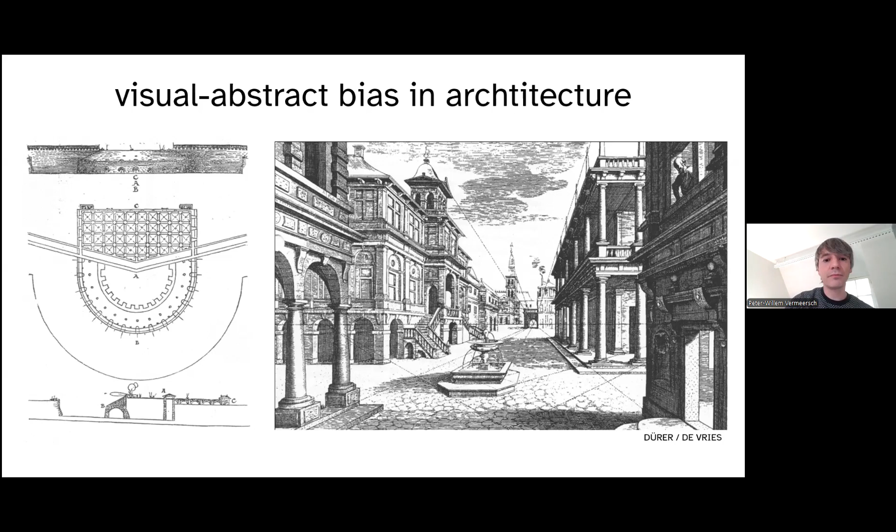In the Western society, we have developed techniques such as perspective drawings, relating back with the development of the single point perspective. We see that, for instance, in the urban organization, that these axial designs become in vogue. So there is a link between the kind of techniques and tools we develop as architects and the kind of architecture we make throughout history.

But also in our contemporary days, we see that same kind of thinking further being developed. So we work in abstractions, we still work in plans, visual schematics, but also the techniques that we've developed that go more beyond the abstract towards the experiential. We see a heavy focus on visual realism. And even if we make physical models, we tend to mostly look at them and make these models to evaluate the visual quality of our projects. And one of the effects is that the kind of architecture often goes towards visual iconic value.

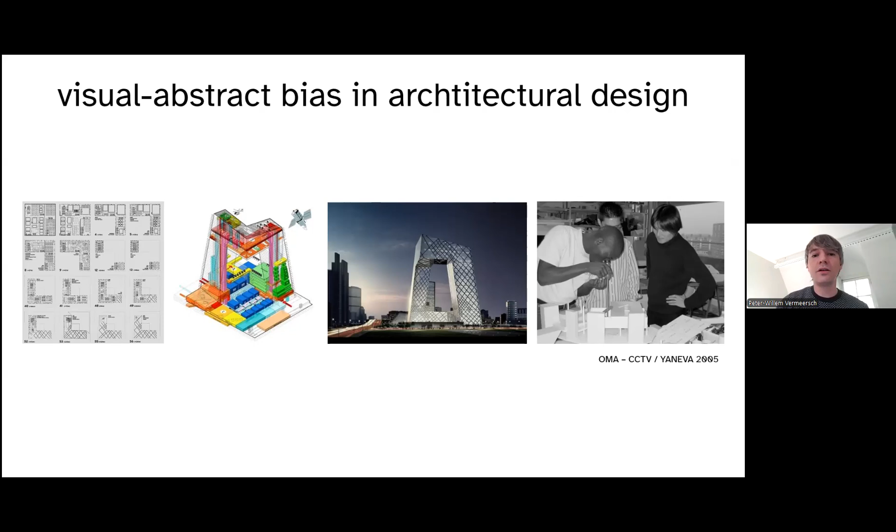But in fact, we can say, okay, architecture is to blame, but it's a more general aspect in our society, and architecture is one part of that. And we also see it in how the body is often defined. In architecture, from the Renaissance, we see that the body is a source of proportion. Architects strived for divine beauty, and since in Catholic thinking at the time man is created in the image of God, they found these proportion systems in our own bodies.

Later in modernism, we've seen two strands of modernism. First, organicism, looking into the natural processes and understanding those processes and designing from that. We see also that the human body is seen as a natural object in motion that has certain dimensions, which has eventually been developed into the field of ergonomics, of which the book of dimensions of the body by Neufert is, in our education system at least, a very well-known example.

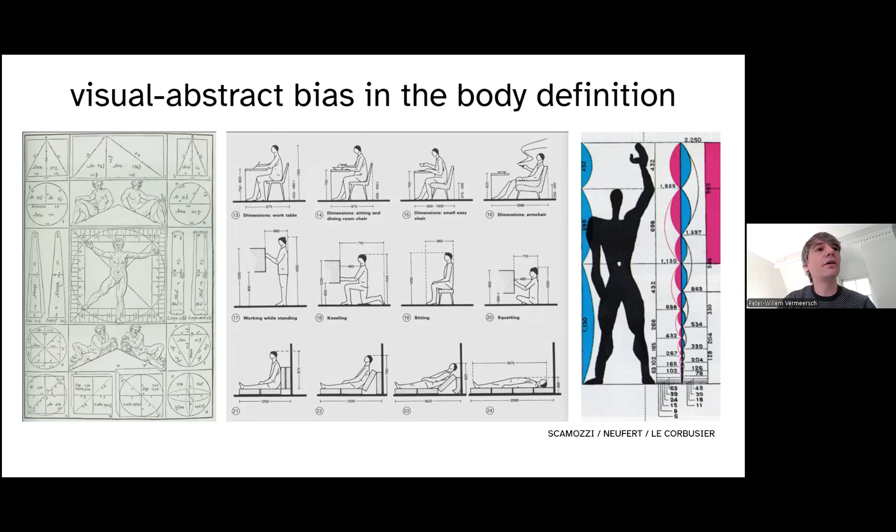So this kind of thinking has led us into a direction with a focus on vision and a focus on abstraction. But of course, we know that our body is more than just the sum of its parts. So we look into disability studies, which say a bit more about the human body. So from this understanding that historically there is a visual and abstract bias in architecture, what does that mean when you cannot see anymore? What is the meaning of architecture in that regard? And that was the starting point of my research. How do we engage with buildings in non-visual ways also?

For instance, developing more attention for the senses of touch, of sounds in our environments, and smells. And to better understand that, I've turned to the work of Professor Patrick Devlieger, who has been studying what disability is in our society for quite some years.

And he came up with an understanding that throughout history and within society today, there are different models of understanding disability. And the first model is a religious model. It's the oldest model, where it was seen that if you have a physical body impairment, it can be either a punishment or a gift from the gods. In your experience, your quality of life, you are either marginalized in society or you get an exceptional position. And the questions that are asked around this are why, and the existential question, why me?

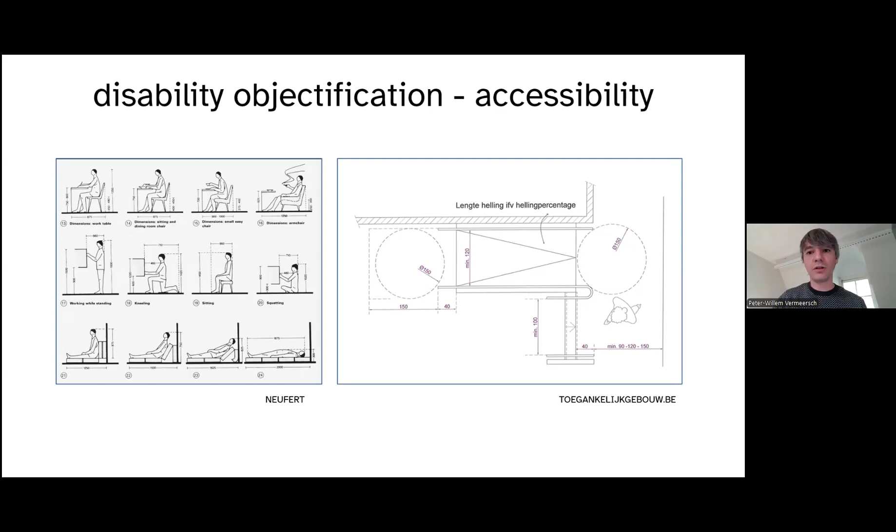Coming from the social model, the more vocal group, if we look back to the United States in the 70s after the Vietnam War, the war veterans were a politically very strong group.

But in his studies, Patrick Devlieger also developed an understanding that there is a possible cultural model as well for disability. So it's also rooted in how we even consider what it means to be human. So it's on the level of identity. Yeah, so his studies were focused on the insight that people who are deaf have been developing their own culture, because they have their own language, and thus form a specific kind of group within society with their own identity.

And actually their quality of life becomes transformational. It is looking into what is specific to our experience and how we can get a sense of being out of that, and how from that idea of identity we can critique society at large.

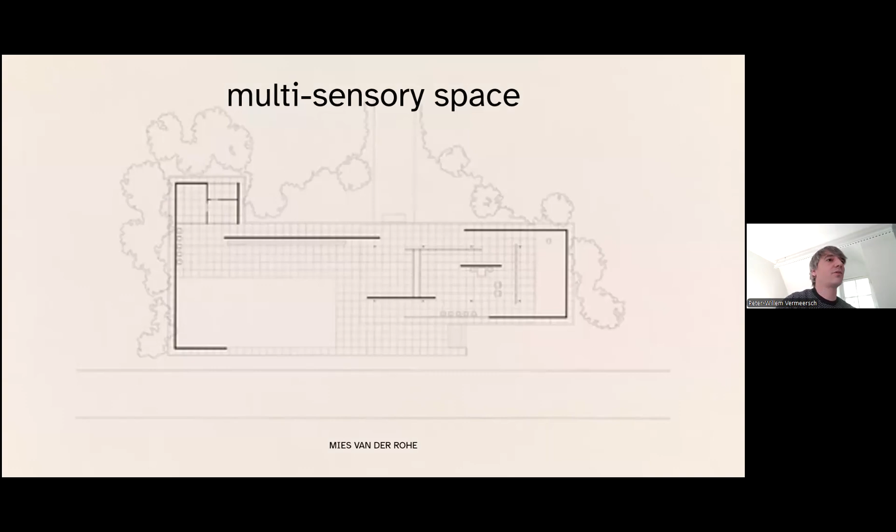But we also learned from these kinds of interactions with, for instance, Carlos, that there are also other kinds of spatial qualities, and that these spatial qualities have their own distinct boundaries in space. So when Carlos explains how he pays more attention to the warmth of the sun on his skin, he also explains that for him there are now two extra spaces. So it's not only the visual space blocked by the wall, but also the space where he feels warm versus the space where he feels the coolness of the shadow. And in between those spaces, there is this boundary. Here we can visually see it, where the shadow and the sun are separated. But these lines are not on the plans.

The same with the acoustic space. He explains how the sound of his cane, the reverberation of his footsteps, when he is in an open space, disappear into the sky. But when he enters this space that is covered by this small roof, the reverberation changes because the roof also acts on it, and it becomes a separate kind of space for him. And again, that line, that transition, is not on the plans that we draw.

Also visually, we can say that there is this kind of transition from the spaces on the left that have this warm travertine material that reflects the light, versus the colder, bluer light in the small courtyard on the other side of the building. There again, the atmosphere of that building completely changes. So this is one of the key findings that we take from this investigation with them, and we will explain it with some of the projects that they have designed themselves: multisensory space has different layers according to the different senses, and different boundaries than we are used to when we only pay attention to the visual space.

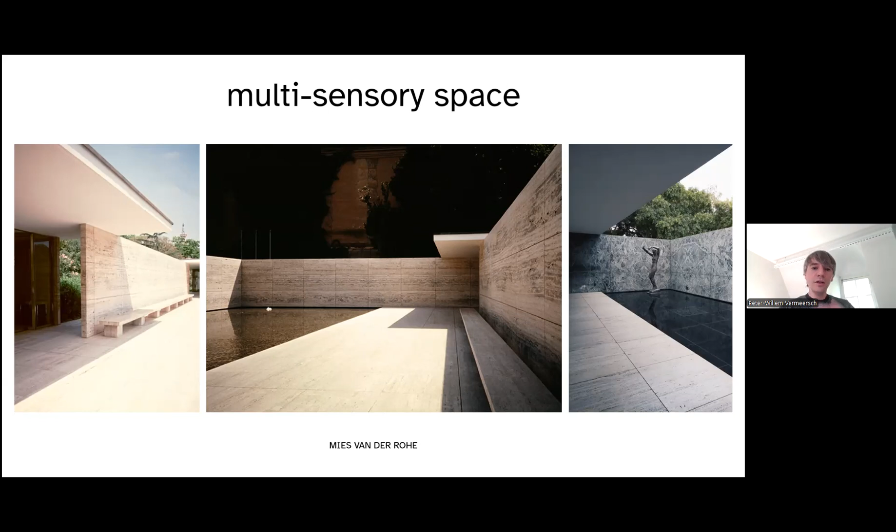As much as we can bathe in light, vision can as much put us inside our world as hearing can put us outside the world when we start to abstract sounds, when we start to name them. The people who listen to or observe birds can distinctly pinpoint and name different sounds in our environment. And so they are not as much involved in the sound, but much more objectifying, again, the specific sounds that they can distinguish.

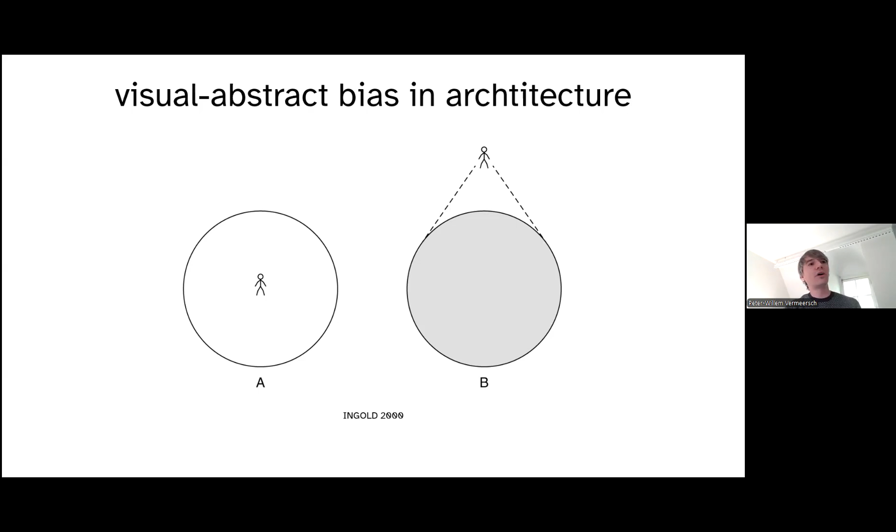So that was a bit of a side note: our insights about this multisensory space can actually also help us understand vision in architecture as well. I'm not going to go deeper into that part, but that was one of the findings of Natalia's PhD, that there is a possibility to understand vision in a new way. But now I will go deeper into the cases that I studied in my PhD, by Carlos Mourão Pereira, but also the case of Christopher Downey.

As architects who have lost their sight and continued to look into the profession of architecture, they were very interesting cases for me to study as an in-between the theory and the participatory approach. These are people who have both the professional expertise and the user expertise within themselves, and I wanted to study what kind of possible knowledge exchanges, what kind of results can come out of that.

And the first case that I want to study is the sea bathing facility that Carlos designed. In Portugal, the coast can be quite dangerous. The surf can be quite rough. So they have this habit of building swimming pools along the coast, to be able to go swim but not need to swim in the sea. And they are a bit further away from the sea. So while you swim, you can see the sea, but otherwise you are a bit distanced from it.

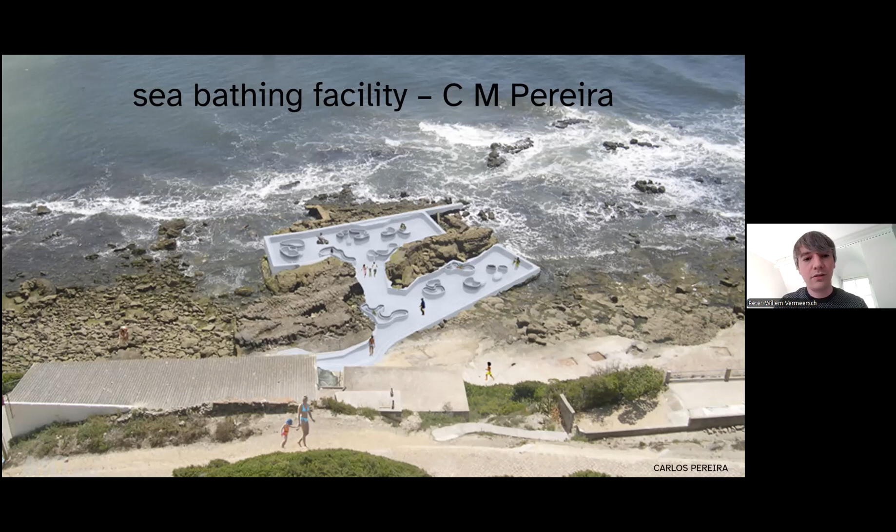And that's where he started to think of what kind of swimming pool type can I design that still has this notion of safety, but that brings me back to the sea. And he positioned his swimming pool in the location between high tide and low tide, so that if we make a representation of the space of movement, the haptic space, the tactile space, the space of touch, we make a distinction on the left side for the high tide, where you are safe with the walls, but the waves crash over, they come higher than the walls. So they start to give you this experience again of being in the motion of the waves.

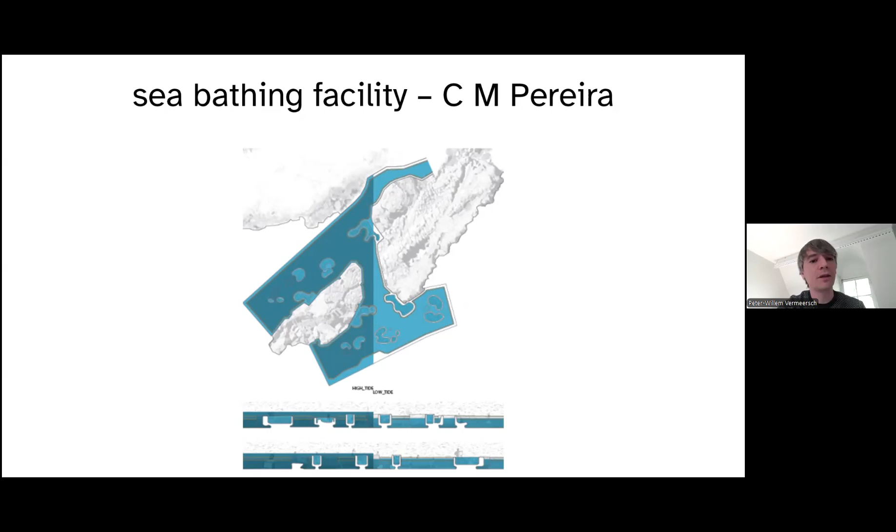And you also have the wind blowing against your skin. So you also have this boundary between the water and the air, which is also for Carlos a very important boundary that he started to investigate. And when the tide is low, you have again this calmer experience, but also these puddles of water. The smaller basins retain more water. And it's his conception that within these smaller puddles, the sea life can take hold again and grow and develop and be experienced almost as a museum of sea life, a museum of the sea, a museum of the surf.

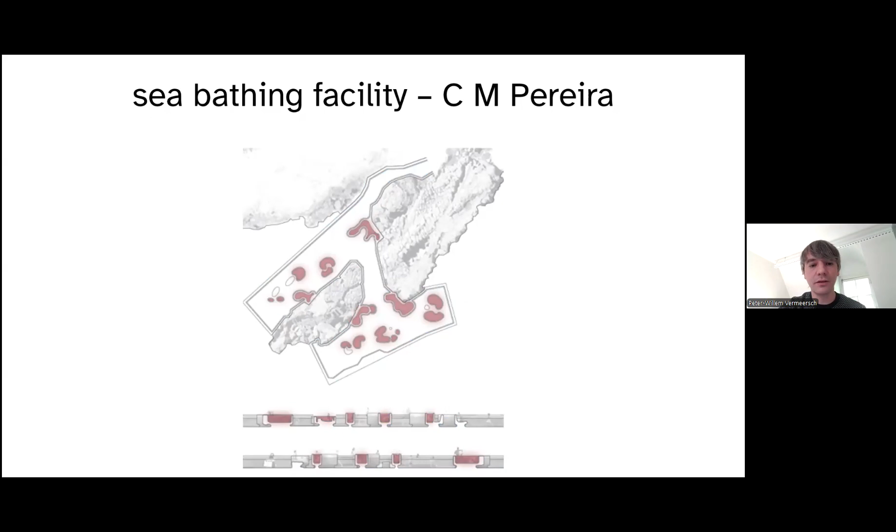And so for him, this becomes the olfactory space as well, the space of the smells of the sea, and the space of the sound. Where the olfactory space is a very localized space in his design, the space of the sound is a much more gradual space. On the lower part of this graphic it goes much more into the sea, so the sound of the waves is much stronger, versus when you go up, more inland, the sound of the waves becomes smaller and smaller. So you have a gradient from a very violent towards a more calm acoustic space.

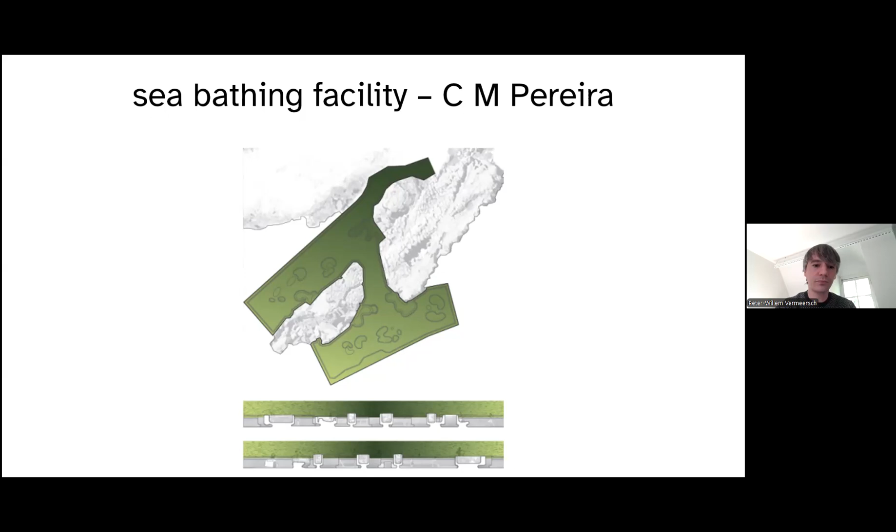And that's what we then start to say, okay, these are the distinct sensory spaces that we can define in this project, apart from the visual. But we also see that they have their own kind of logics, and it's only together that they start to form your multisensory experience of this project. It gives a time dimension, high tide, low tide, but also the pockets of sea life are experienced in a wilder acoustic environment, and the ones more inland in a calmer acoustic environment, and thus become something different. And so actually the visual void that we tend to design with this.

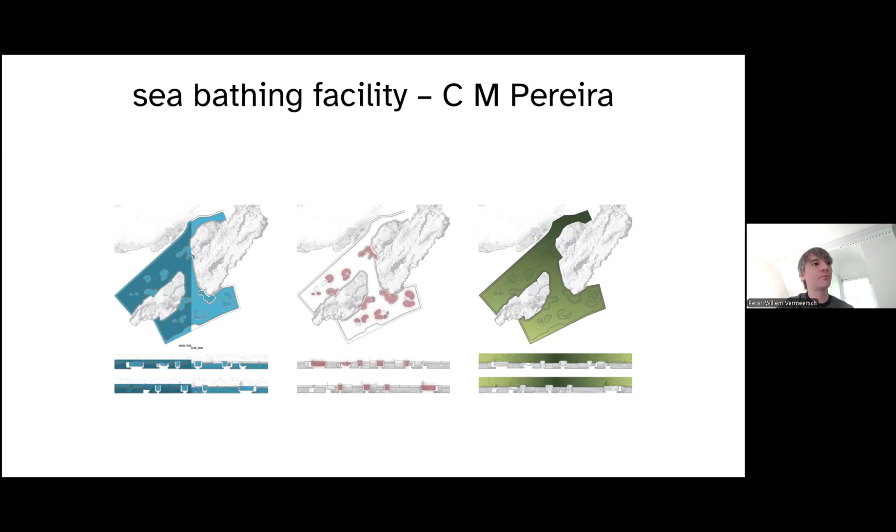So we have constructed space and void space. Actually, this void is full of sensations with their own logics, but also, as we will see with the project of Christopher Downey, I think is a very interesting example of how this void can be shaped, how the sensory spaces can get their own shapes and own meaning and own ways of understanding and giving sense and giving information as well to visitors.

And so from Christopher Downey, his work, we studied the Polytrauma and Blind Rehab Center that he designed in the US. So he is a San Francisco architect who joined a larger firm called Smith Group. And he joined them as an architect and as a consultant. And this was one of the first projects that he worked on, where he was also, as an architect, a user expert, because at that point he had recently gone through that process of rehabilitation when you lose your sight.

And so this is the entrance of the building. So it's constructed mainly of two wings with a central garden and the main entrance in between those two wings. Here marked on the right-hand side, we have this main entrance, and the building is designed as a loop around this central, also sensory garden.

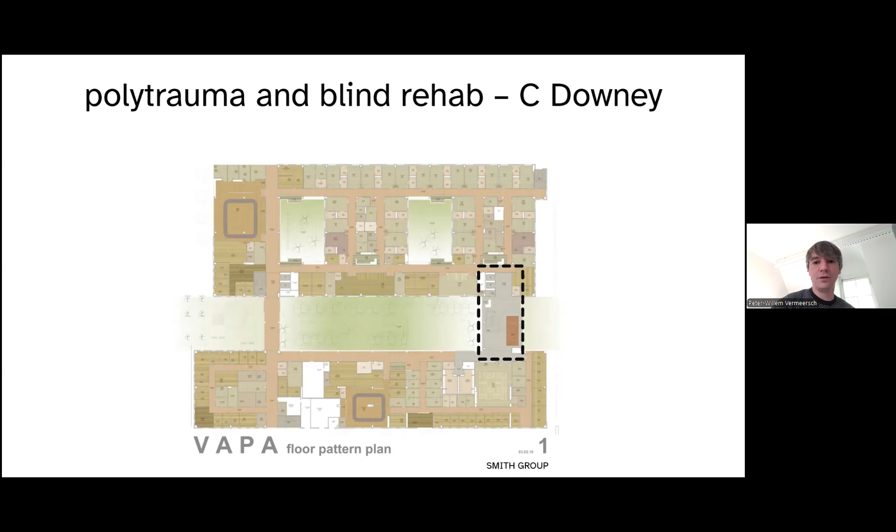But the way he designed the space, so this space is an entrance space, but it's also a connection space between the two wings. So there is a clear flow in the vertical sense in this drawing. There's a clear flow of people that have to go from wing A to B and B to A. And visually, this is given shape. The space has been made a bit elongated, so it has this sense of direction to it. It's a rectangle, it's not a square, so there's a clear sense of a main direction into the space. The same he wanted to do with the acoustic space.

Yeah, so he had a very particular experience when he lost his sight. At a certain point, he started to notice the path that he took from the subway exit to his office. In San Francisco you have this type of covered pathways because of the climate, and this particular one, on the right-hand side, was made with an arched steel roof, steel plates.

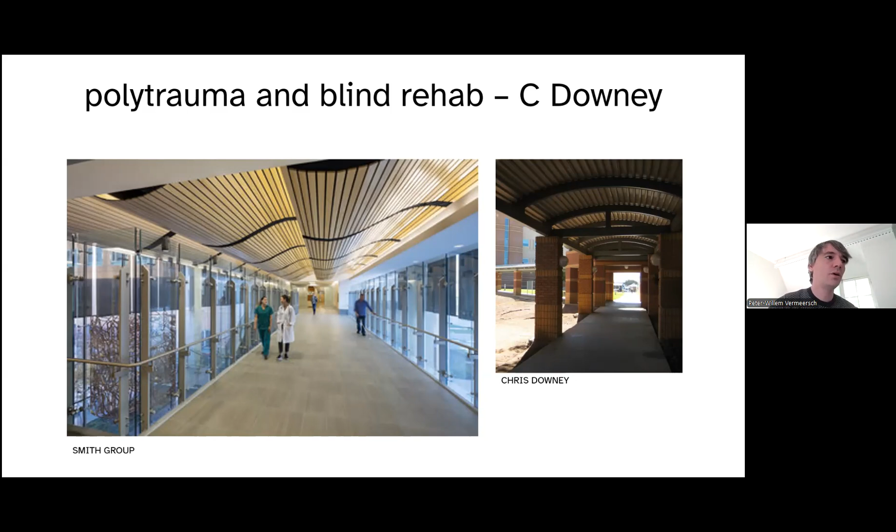And at a given moment, he started to notice, okay, the reverberation of the tapping of my cane actually travels in the direction of this path. So I can keep my direction just based on listening to the reverberations of the tapping of my cane. I don't have to necessarily follow the path by touching the edges, or going from column to column. And this understanding that sound can have a directionality was for him a very powerful insight, and something he wanted to translate into this entry space, or connection space, where with the shaping of the ceiling he tried to give a certain direction to the people moving from wing A to wing B.

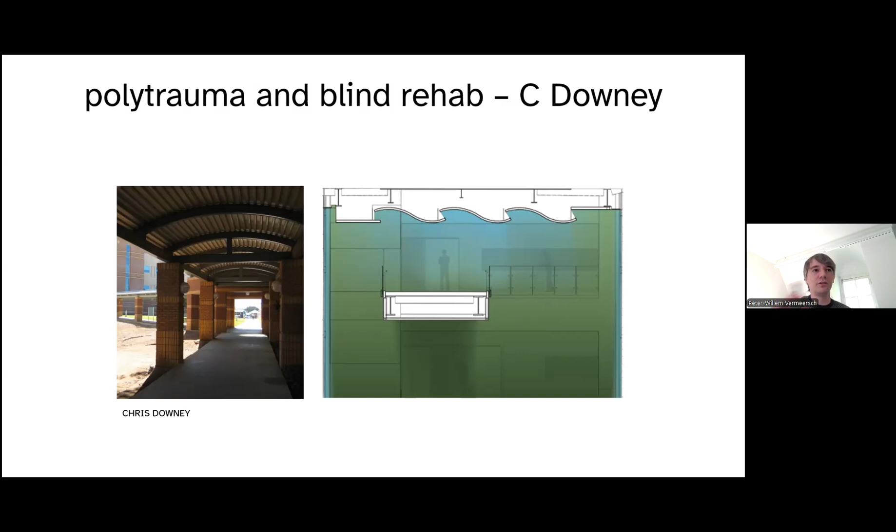And when we try to represent that in the section drawing of the space, we've colored where there's more clear reverberation with a more bluish hue, versus a darker green where there's more absorption. Because in the space below on ground floor, he has the same directionality, but did it in the inverse, where he made an acoustically very absorbent ceiling, so that there's a difference between the reverberation you hear when you walk under the bridge and when you walk not covered by the bridge. So in plan, you can follow that line. The clear blue and the dark green create a clear line within that space. So sound can also have directionality.

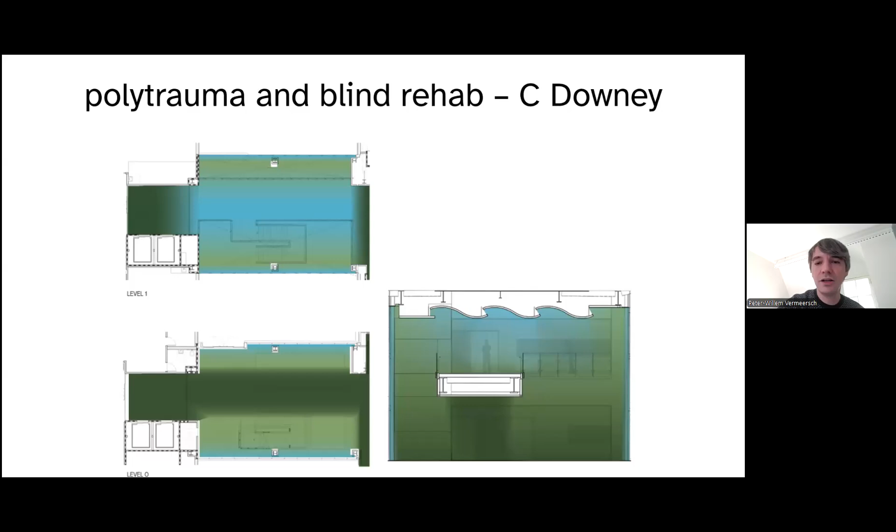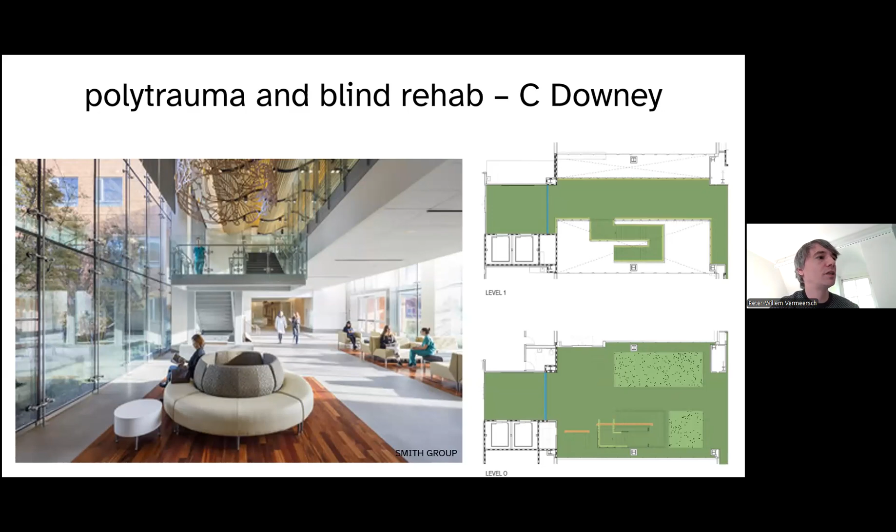Yeah, and that same kind of directional experience he incorporated also in the sense of touch. So there are different floor materials, so the edge between different floor materials can be felt through the soles of the feet or with the cane. Also there's a clear direction in a number of edges, like the handrails on the bridge. There's a clear direction in the sense of touch as well, with a similar directionality.

But also they did light studies, how the light entered that space, between the shadowed space and the sunlit space, and they found that it has this same kind of directionality that they can use because of the orientation of the building.

So these are just examples of the kind of way their thinking changed. Carlos mentioned that before he lost his sight, he was trained by famous Portuguese architects like Siza. And he said, I was trained in this very visual architecture, very clear-cut lines. We have the very harsh sun in Portugal, so we can have very clear lines in our architecture, visually speaking, between the building and the sky and the shadows that are created.

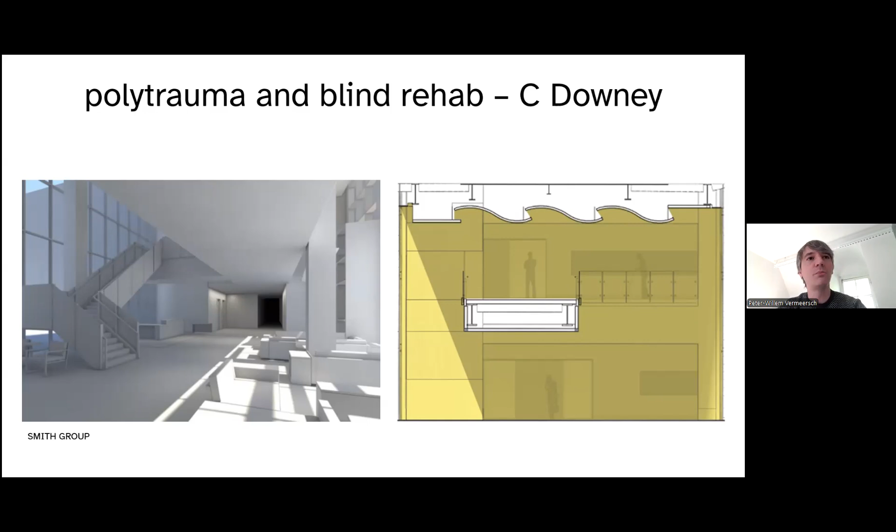But now he looks for an architecture more of the whole of the body. How can he do something for all the senses, and not just the visual sense? Although they remain architects, so the visual quality remains very important. So they are quite sensitive to instructing their collaborators, and that's something also that they had to rethink, is how I design. How can I design when I cannot look at my plans anymore, when I cannot see what I have been sketching anymore?

And Chris Downey investigated the use of Braille printers, but used them as plotters of plan material. And then with wax sticks he started to sketch, like we print out a plan and with a pen start to redraw lines on the plans. He does the same with these wax sticks so he can touch them. They don't shift away. They stick a bit to the paper and remain in place just enough for him to make different variations and developments of his design.

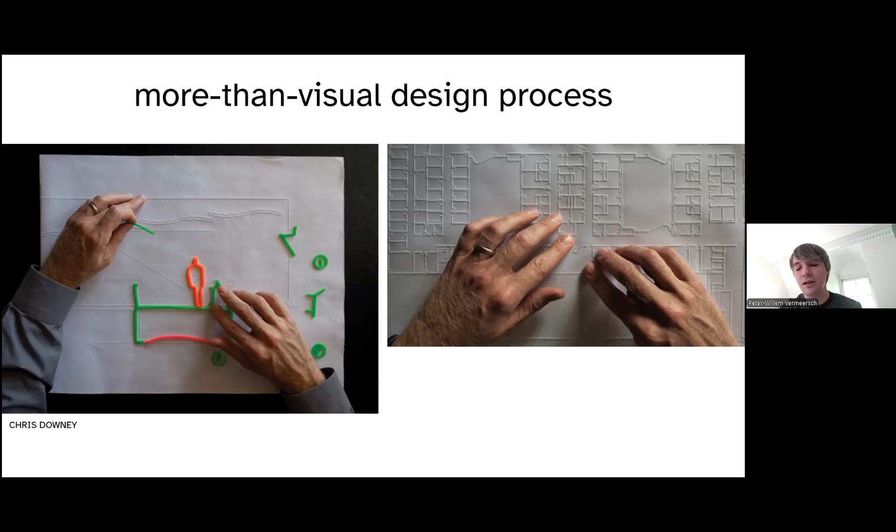But also the investigation into what is the scale that I need to print in, what is the level of detail that I can discover with my hands. And we see that also with Carlos, the same idea of scale, what is the scale that I need to work in versus the level of detail. Carlos tackles it by making a lot of models, or having collaborators make a lot of models on different scales, so that each time he can hold them in his hands while he is investigating it.

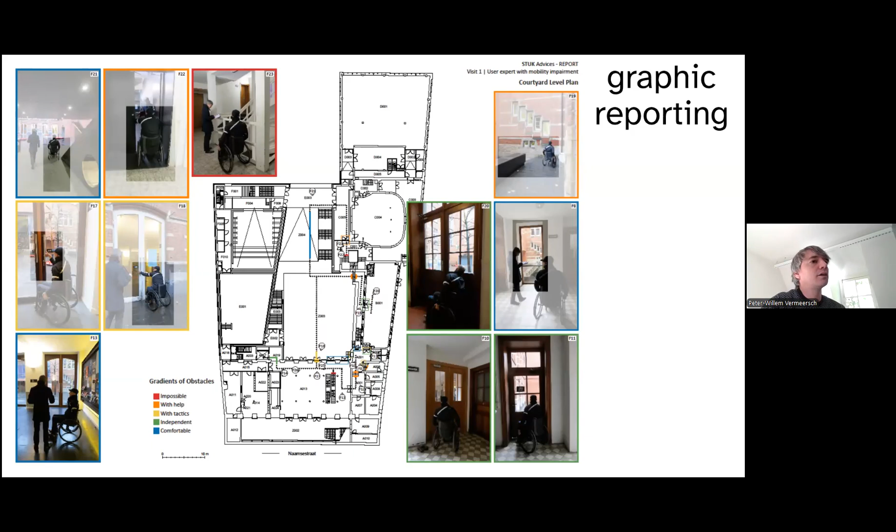So after these building visits and the reporting in text, but also graphic reports, we also can offer to involve people further in the consultation that we give. Yeah, so that's what in the slide that I showed, who is involved in the dialogue. In the evaluation, for instance, we also try to involve our user experts back, and then for instance, we work with the plans and drawings of the architects, but we also make some of our own models.

This is an example of where we made a touch model for the user expert with a visual impairment. And we call them visuo-haptic. Haptic because it's much more than just touching, it's also moving around in the plan. So we get a lot of information about how this person also would move through the space if it would be built. So how she moves her hands and fingers through the space, the kind of edges she is looking for is also the way that she would move with her whole body through the space, scale 1:1.

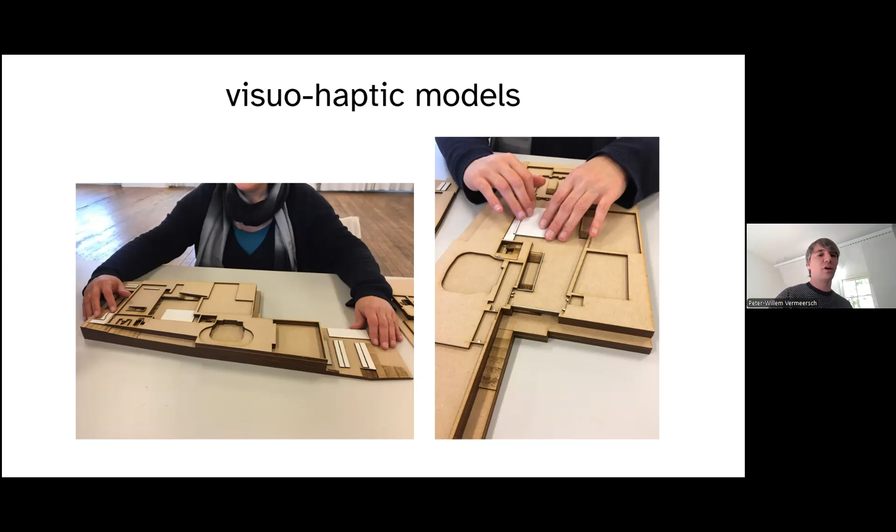And so we can actually work quite well with these scaled models, and also making them such that she can always keep an overview of the whole, so she can touch everything without moving the model and still move further into the model to find more detail. And if we need even more detail, then we make a different scale of model. And so we also call them visual because we see what she is doing. And so we can interpret, we can ask questions about where she is in the plan, or she can point out to us what parts of the plan are under question.

And also in this particular case, we also did the consultancy on how to make the guidelines in the space. So we had a whole discussion with her what walls can serve as natural guidelines and where she would need more formal guidelines with striped tiles or metal strips in the floor, leading her from the entrance all the way to the reception desk in this case. That's also something that we can do with these models. They are working tools. They are not just presentation models.

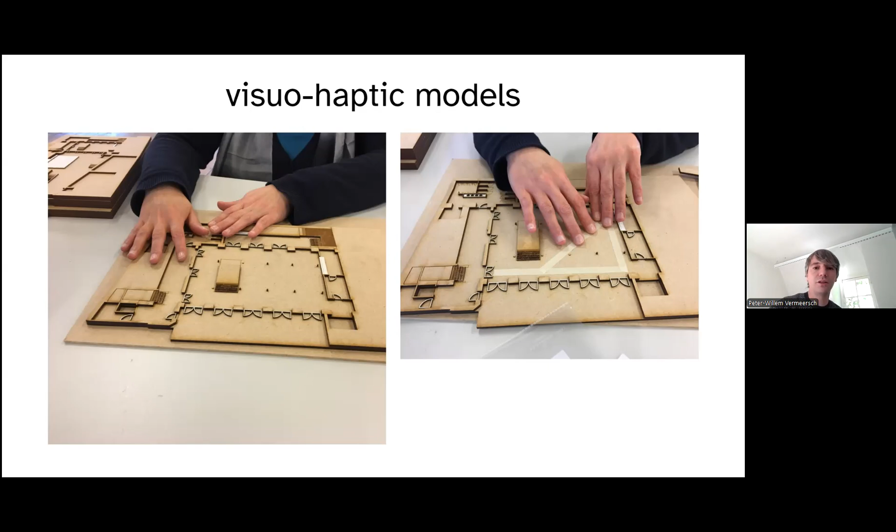And lastly, something that we also can do is in situ testing with materialities. This was a specific project where in Leuven, historic buildings are often paved with cobblestones in their courtyards. So from heritage value, the cobblestones have a lot of value, so we cannot just remove them for accessibility reasons or reasons of inclusive architecture. And we know that cobblestones are really, really cumbersome for people in wheelchairs, but also people with canes. It's very difficult to get any sense of information. There's a lot of noise in that information that they get.

And so we also guide them in testing together with the user experts, testing different ways of, in this case, using different kinds of cobblestones, like more flat cobblestones, and different ways of filling up the seams between the cobblestones. And in this case, we ended up with a certain resin that's mixed with sand, so it has the same appearance as the historic sand fillings, but will never wash away, so the seams will remain as flat as possible.

And for the last about half an hour of my talk, I will dive more into one specific method. It's the method of co-design that we used and developed for a project, the Multisensory Museum that I already mentioned, at the Van Abbe Museum in Eindhoven. Yeah, so the Van Abbe Museum is in our region very known for its inclusive program, its inclusive approach to what kind of collection they develop.

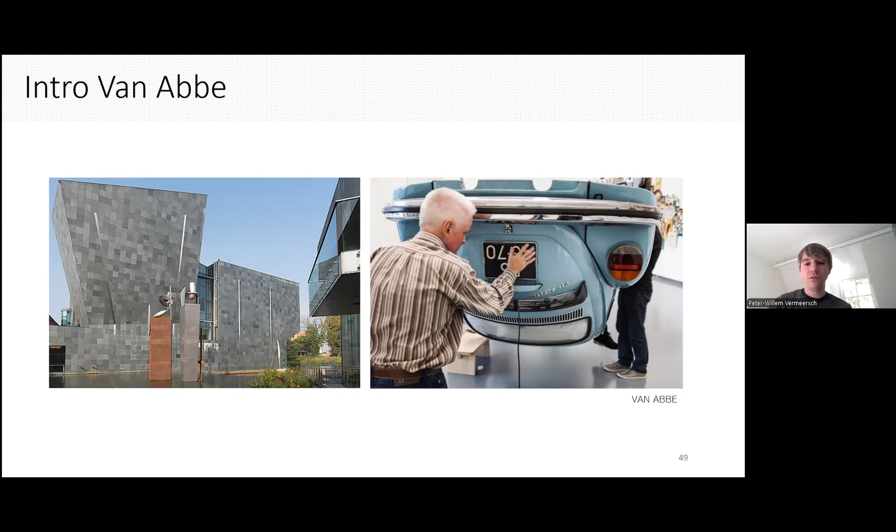So of course, it's also a nice example that as architects, we are also limited by the ambitions of our clients often. But here we were very lucky to find a very good match in that sense. Of course, because we were experimental, we didn't have...

It was the very first time that we would build something with all this research that we have been doing. We have been studying, and we had all this theoretical insight. We studied processes of architects with impairments, with disability experience. We studied collaborations or what kind of knowledge exchange that could be, but we didn't have a designed or built space or building yet at that point. And so we got a very small space in the museum. So if the experiment failed, it was not a huge risk for them.

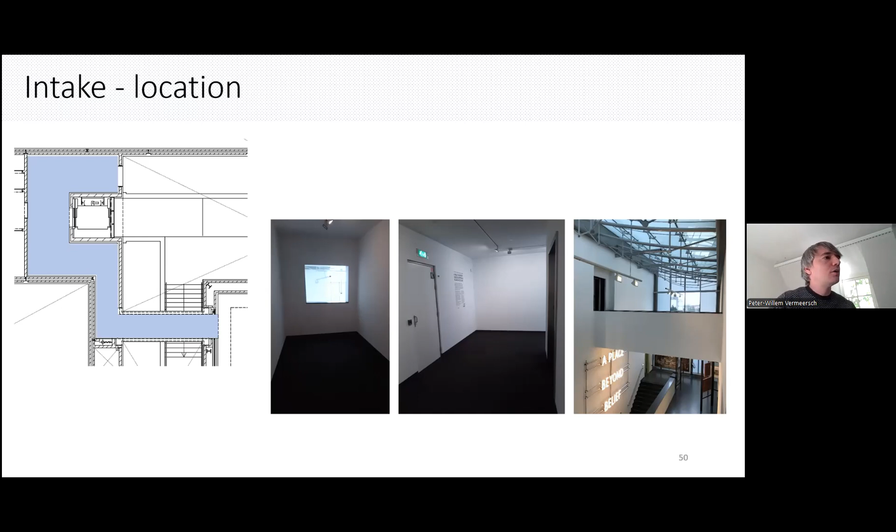And then together with the museum, we selected different user groups that we wanted to work with. We limited ourselves to three groups for this first time: a group of people with mobility impairments, so people who use electric wheelchairs but also manual wheelchairs. We worked with a group of people with vision impairment, people with low vision, and people who are completely blind were involved as well. And we worked with a group of people with a hearing impairment.

So people who are hard of hearing and use hearing devices were in the group, but also people who were deaf, used sign language and relied on visual information and sometimes vibration through the skin. So these were the three groups of people that we worked with. And they were recruited through the Van Abbe Museum, their network of involved users.

Their familiarity with architecture and with the design process ranged from people who were retired and had been active in urban design, to people who had never even discussed anything with an architect. So a very wide range of experience going into the workshops. We also provided some structure in these workshops. So we had in total four types of workshops with the three groups.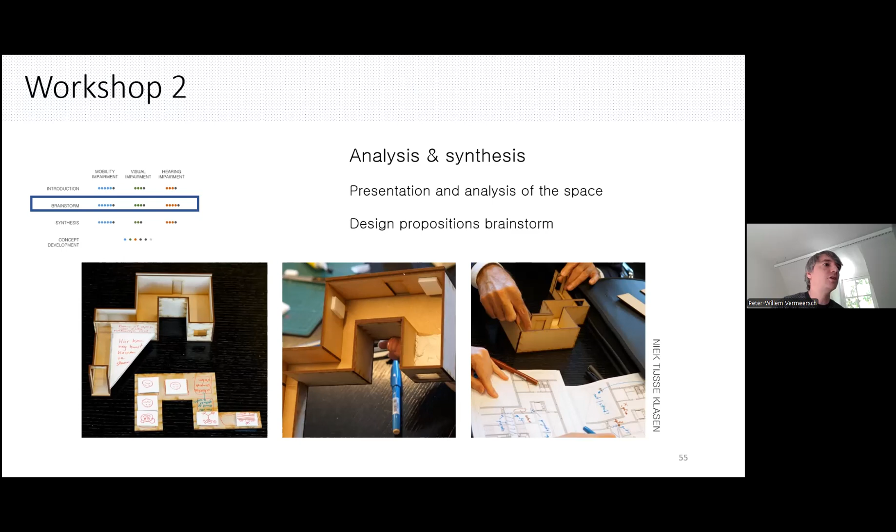And as a workshop organizer, I was only there to maybe draw something for them if they felt uncomfortable drawing their ideas out, or asking here and there a few questions just to get their ideation flowing again when they were a little bit stuck, or putting two people together when I thought they had very similar analyses, so they could work a little bit together. So I was only there to facilitate, but all the ideas should come from them. They were in charge of the ideation at that point.

And you see some of them made annotated plans. Others really worked on the models that we gave them, or I translated what they were talking about. I drew it out on the plans. Is this what you mean? Is that what you mean? And drew it out for them.

In the third type of workshop, from all the ideas that I saw coming up in the brainstorm workshop, I made my own first synthesis for each of the groups. Because in the brainstorm the ideas went very wide, even in the direction of art interventions and societal discussions, in this workshop I took the lead again. I had the pen in hand, I drew everything, and brought everything back to spatial solutions because it's about architecture. But the dialogue remained iterative in the sense that they could still react to what I drew.

I could still ask if I was going in the right direction with these ideas, if I combined certain ideas, if they would wish for the combination or would like to keep certain ideas separated for some reason. If I could find synergies, present them with those possibilities, etc.

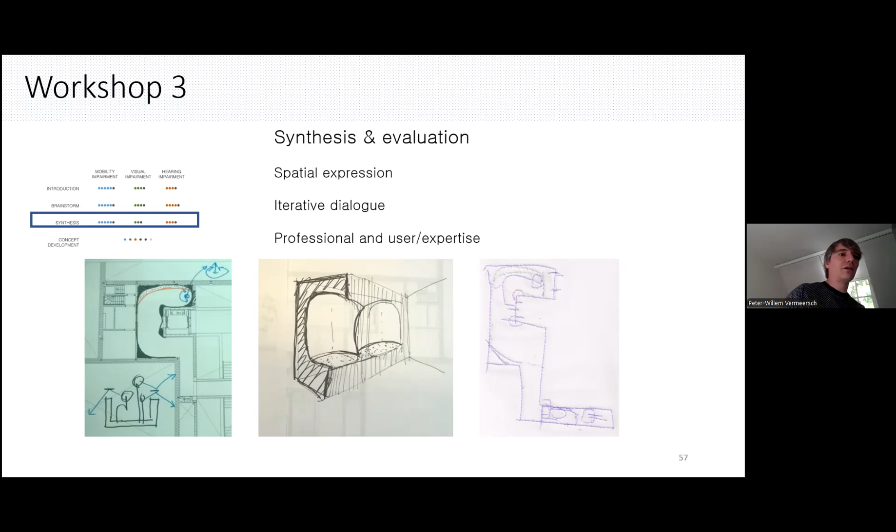Yeah, so these again are some of the ideas that we discussed. Where we saw in the group of mobility impairment very rounded shapes, in the group of people with auditory impairment we had these more slanted shapes to break a bit the reverberation, because of all the parallel walls, we had some strange acoustics, very strong reverberation. So how can we break that? That's where professional expertise again comes in. How can you break reverberation in space by making angles and not parallel walls, etc.

And there's the idea bottom left from the people with vision impairment, to really emphasize all these different atmospheres, and also even name them. You had the salon, which is where you sit down, come to rest, which is more quiet. You had the room, the chamber where you present your artwork. You had the portal, the transition space between the bridge and the elevator, etc.

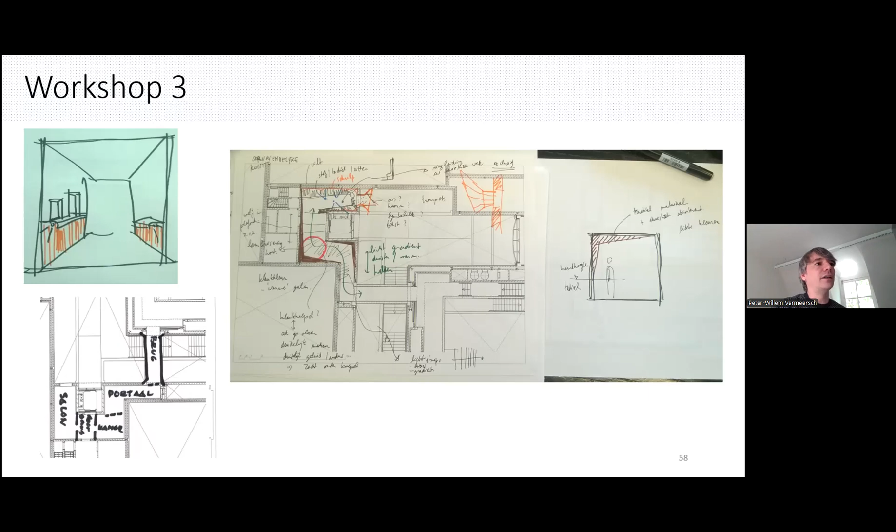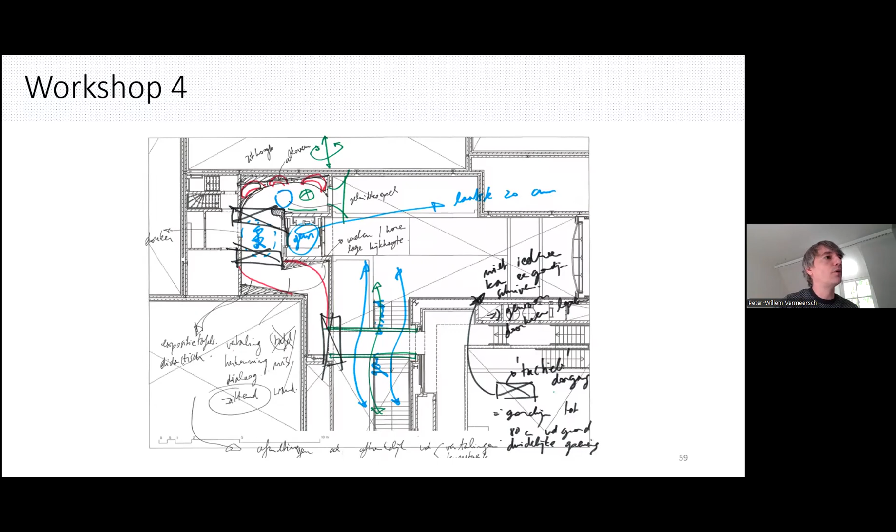And then in the fourth workshop, with representatives of each group, the architect and the client also enter the discussion. And there, the ideation, the concept, is again more guided by us as architects and researchers, trying to find ways to deal with all the different issues that are discussed. And this is something that we made after the workshop, where we translated the sketch that we made during the workshop, which got a lot of feedback, into a model to see what we can do.

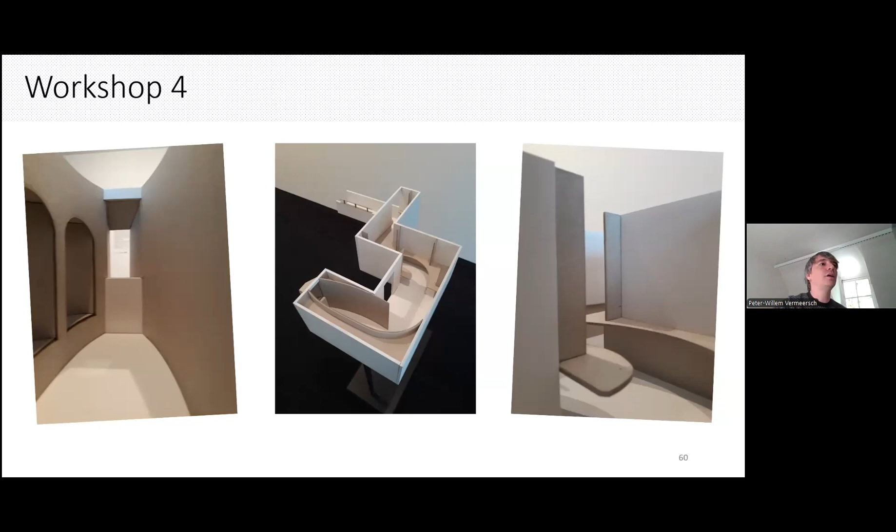So we see these ideas of the rounded shapes to take away the space that people in wheelchairs don't experience. So that's for everybody. We see the idea of the alcoves, the connection with the atrium, to make it even more nuanced without completely blocking it off. The notion of movement we see coming back in presentation panels along the route when you go from the bridge to the salon. And this idea of doing something with the railing and the view into the atrium.

And also we had these testimonies in the space, and with these links you can also go listen back to them. So we have a testimony of the architects involved, but also of each of the user groups. We have somebody explaining their experience of the process and the outcome of these workshops.

So what we learned is that what they found very positive was this idea of mutual learning. We learned a lot from them, but because of the way the workshop was set up, they also got a lot of information and knowledge back from us and got some insight into what a design process is and what this professional expertise is that architects have.

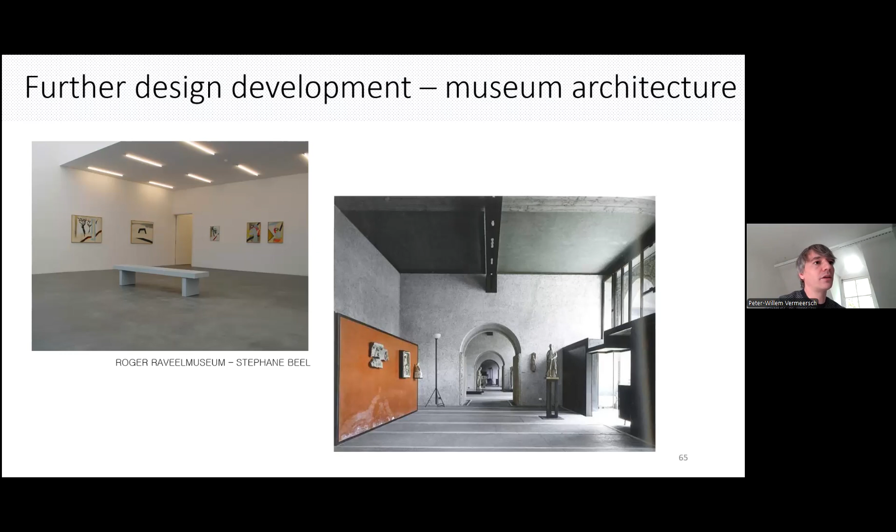With all these ideas that we have, we had a first direction of a concept, moving into combining everything into a whole. We went further with that. So what kind of materiality are we looking into to strengthen all these ideas? And we found there's this notion of caves because of the shape of the space, but also this materiality of Bieke Casteleyn. It's a sort of loam plaster that she works with, so clay and chalk, but added with oils, even honey and wax, to really get a very, very smooth

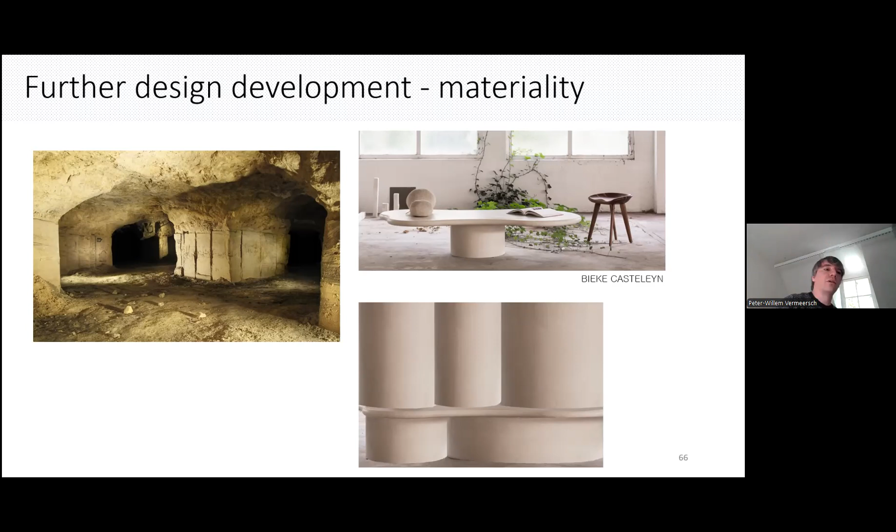surface. And this started to inform us, or to further guide us into looking into how we can construct this, which construction methods, which prefabrication methods, the mountability. We also looked into some of the ideas that we had to test on site that were more difficult to test out in computer graphics or models.

We talked about giving access to this atrium space for people in wheelchairs. How can we test out certain things in situ still during the process? And then eventually we came up with this architectural language that for us also refers back to the body. So the kind of shaping, the color choices that we found, and with a similar kind of architecture still create the different atmospheres that we had.

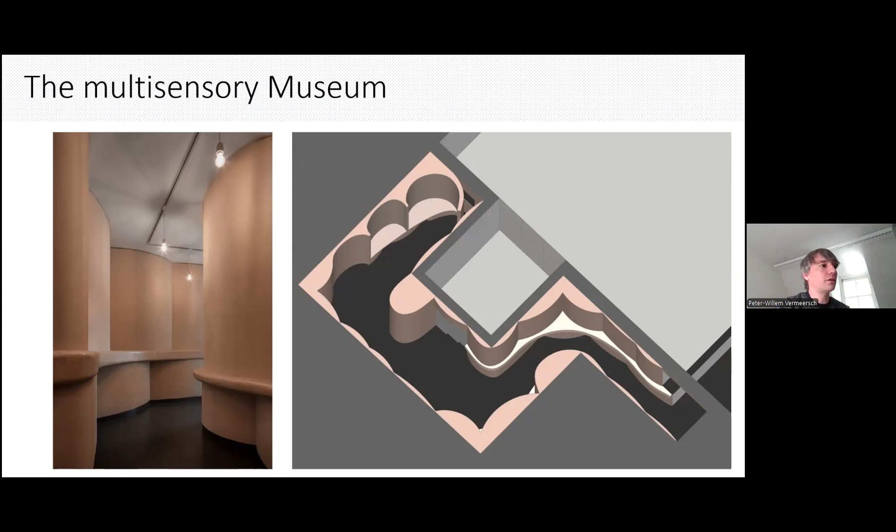And this is then the result, some impressions of the space that we created. It's also with very tactile railings that we put in there at different heights. So also for standing, sitting, smaller, larger people, different shapes, where you can put your hand around it or slide the back of your hand against it. Also dealing with acoustics and body positions in relation to, so the artwork is supposed to hang on the left-hand side there.

We also had at the museum engaged two other parties. One party that designed smells for the space. So for the salon, for the alcoves, they created a smell that would translate the artwork as well. So the artwork is about overcoming difficulties. So they found inspiration in the ozone smell that you have after a rainstorm, this sense of clearing up.

And then a smell for the portal, for this space, was designed as they looked into historic references. It was a smell of tobacco, because they found that there was a historic document about one of the first exhibitions in Paris that was held in a former tobacco storage space that was talked about in those texts, and recreated that kind of smell.

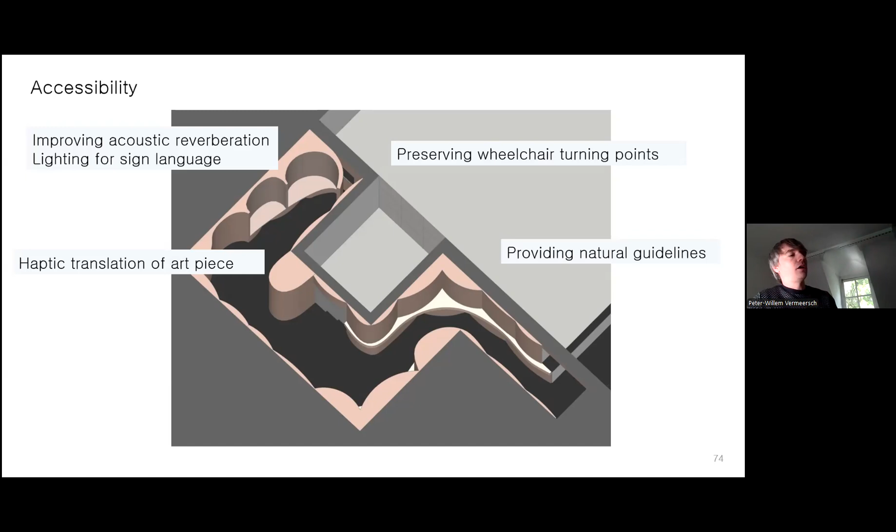We made the haptic translation of the art piece to make it accessible to people with vision impairment. All the wheelchair turning points, of course, are preserved. So also in the salon area, it's wide enough to still turn around. And providing these natural guidelines for people with visual impairments as well. And also this translation of the art piece is accessible for people with wheelchairs to go under with the wheelchair and touch it.

But on the level of these discussions that we had during the workshops, so the idea of equality, exclusivity, so the alcoves are for sitting. On the left-hand side, we made one alcove where you can stand up, but also where the people that use a wheelchair, they can also sit in these alcove shapes, so they have an equal position, and other people are invited to sit down also to take an equal position to engage with the artwork.

We also provide these induction loops in the alcove so that people that use these hearing devices can get information about the artwork. But what was an interesting factor is that they added, okay, but we are often excluded. Maybe we can now exclude others by providing exclusive information through that means of communication that others have no access to, which I thought was an interesting idea for a museum. Maybe not for all kinds of buildings, but in museums you can do these things.

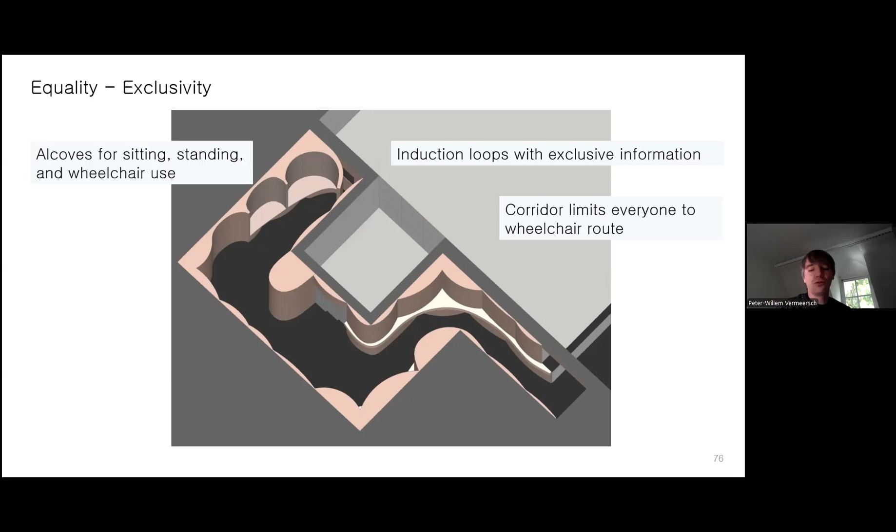Also, the routing through the space, it was made so narrow. The guide rails are so narrow, so close to each other that you cannot pass by, and nobody can pass by anymore, because the people in wheelchairs, before in the existing space, they cannot cross. So they need to either wait for other people to exit the corridor before they can enter. They also cannot turn, so they said, okay, when we cannot do it, nobody can do it. So we made it a bit uncomfortable for everybody, but in an equal way.

On the level of identity, one level is so when you have aspects of exclusivity, of equality, it forms your identity. It gives a sense of who you are. Are you part of a group, or are you part of a smaller group, larger group, ideas like that. So these kinds of experiences help build your identity. So it is emphasis on this art experience from a seated position, to also explain to other groups of people what your identity is, what it is that you have to experience day to day.

Also, this notion of these olfactory translations of the artwork as the smellscape that was designed for the space, that was something from the group of people with vision impairments, that smells are important, or they pay a lot of attention to, is something that they wanted to give to a larger audience, to make a larger audience aware of that spatial quality.

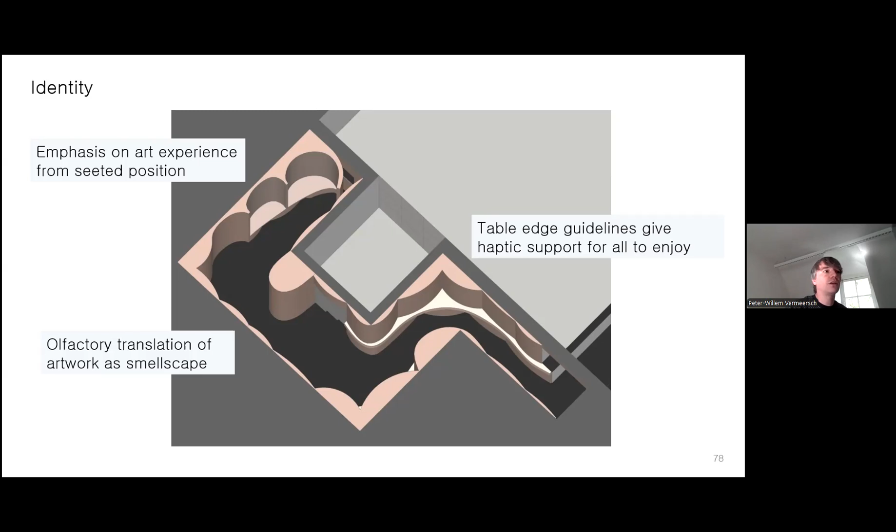And this table edge, this guideline that maybe is there for people with vision impairment to guide them through. It gives haptic support, of course, for all, and to enjoy it. So we really paid a lot of attention to the materiality of that guide rail, so that it's really pleasant to the touch for everybody on the different height levels, so that also everybody is able to experience that part.

And then in this notion of dialogue, which once you have these identity or aspects of identity, they give a possible look into other people's experience, other people's lives, is something that can form the start of a dialogue, to exchange that kind of information, to learn what we explained in the beginning about the sensory exploration, but also the sensory teaching. How can we learn from each other, and how can we share that knowledge?

Here it is quite explicitly put into these alcoves that are designed such that you can sit with two people inside them, and they are designed as such that you also are turned a little bit towards each other when you sit in them, so you don't look next to each other. You are invited to start a small conversation about the experience of the space, about the experience of the artwork, or any kind of exchange.

And it's designed as such that the sounds, because of the shape, the sounds that are reflected, they reflect back to the speakers. But mainly it's an acoustic absorbent space, so it's pleasant. There's no reverberation, but also the light is such that people can still use sign language. You can still see each other's faces and expressions and emotions, and yeah, for a larger audience and more narrowly engage in lip reading.

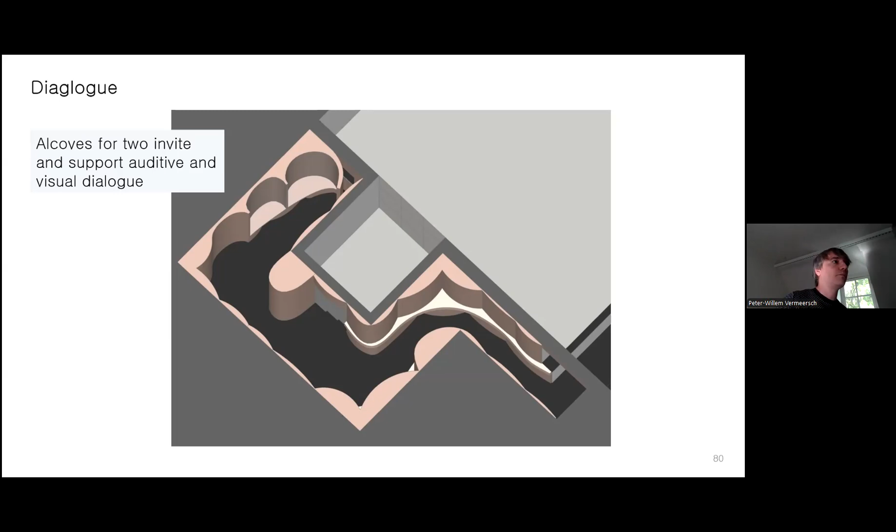And finally, we hope that this dialogue might lead to building some sense of empathy, not only by talking to each other, but also by sharing your experience. So by making the sensory space richer, as rich as possible, we hope that there are more possibilities to have a shared experience at some point, at some level, in some kind of sensory subspace, so that you can start understanding each other better.